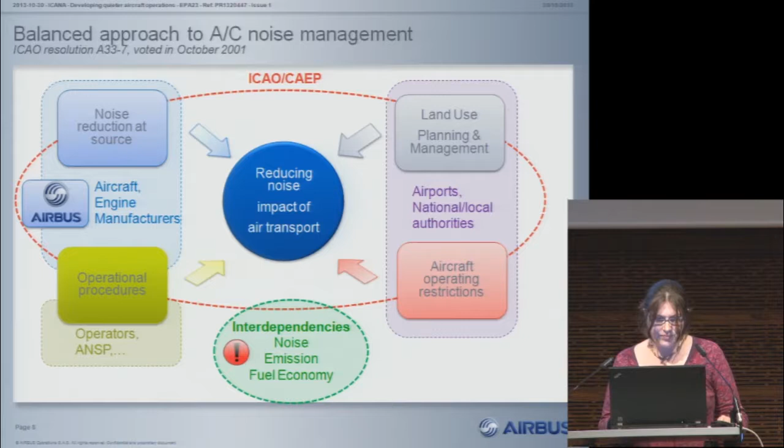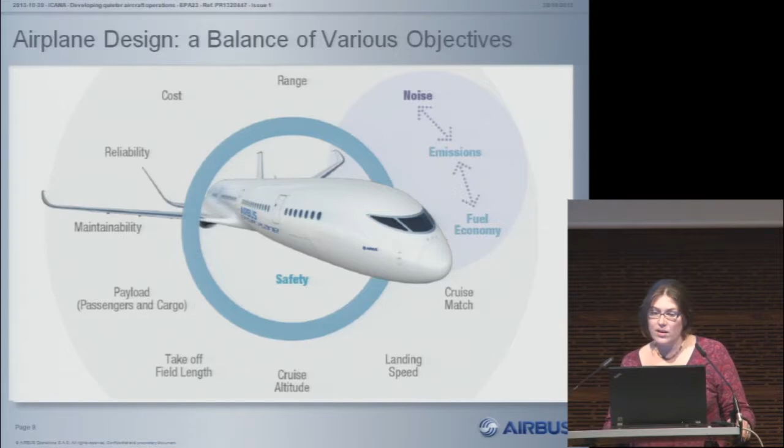On the Airbus manufacturer side, we also apply our own balanced approach. We need to take into account all these different objectives, and most of them are very contradictory—sometimes you can't optimize emissions without increasing noise impact, as we'll see with future improvements in landing gear technology, for instance. If you add some noise technology, you also add weight, which isn't good for the aircraft. So sometimes we need to balance all these considerations.

So what do we do on our side? I will follow with an overview of our fleet with our new aircraft, and we'll see the different optimizations that we achieve now.

First, the current latest aircraft, the A380. With the increasing environmental challenge and size, noise was a main driver in designing this aircraft in terms of architecture and technology choices.

What we can see in this slide is that the first level is the engine. We optimized the engine with new technology, with a zero splice inlet for instance, that leads to reduced fan noise. We also increased the acoustic liner inside the fan, and also inside the engine. Hopefully we'll show you more, but first we have an overview of what we can do inside the engine.

The second possibility is to optimize the airframe noise with new technology in terms of slat and flap, with the famous droop nose, that improves the aircraft performance. We also made improvements in the landing gear and flap slat setting, adapting the flap slat setting for approach to decrease noise. But we also work on the lower approach speed to decrease the approach noise impact.

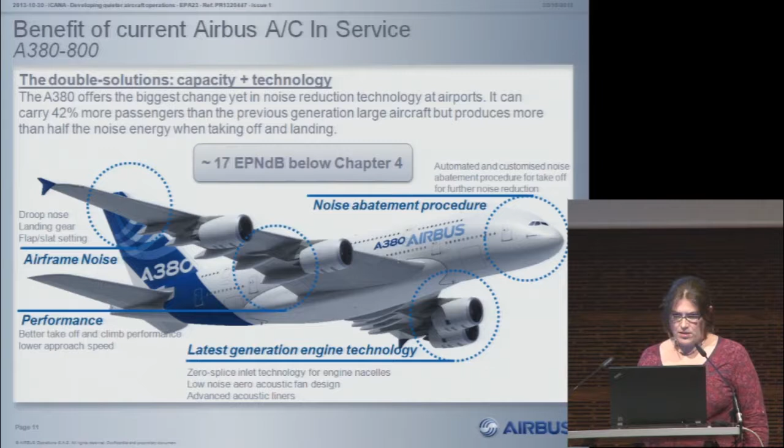What I want to show you also is the quota count limit. We talk about some levels, some measurements, of how we can incentivize or constrain noise design. For instance, the quota count limits the number of available slots. For us it's important, and we take into account this new noise index as a new requirement in our design in terms of noise, because we know it allows more slot allocation, and it's a lever to discriminate airlines and push them to buy different aircraft.

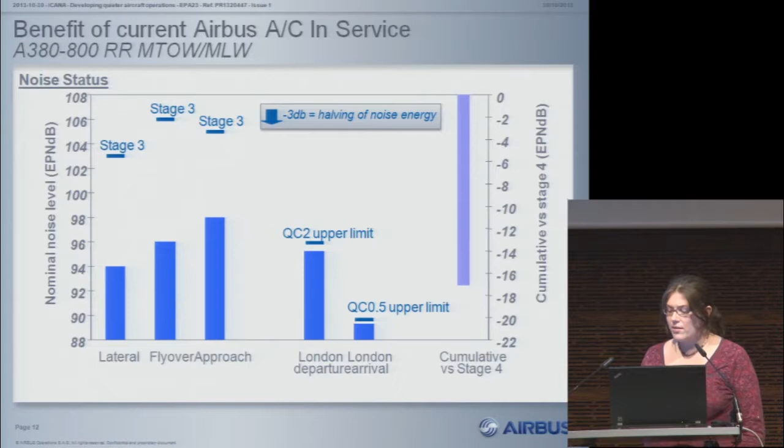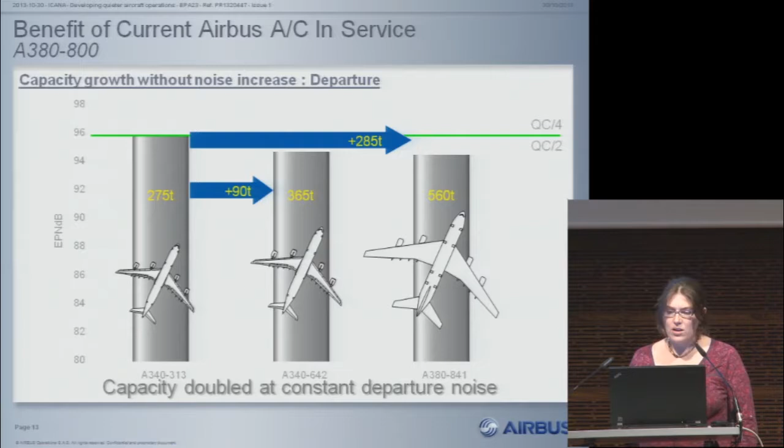This slide shows the large improvement in terms of technology and also in capacity, because this shows that between the A340-300 or -600, which have a big improvement, with double the capacity we can achieve the same level of noise. So for us it was a big improvement, thanks to all the technology I showed you just before.

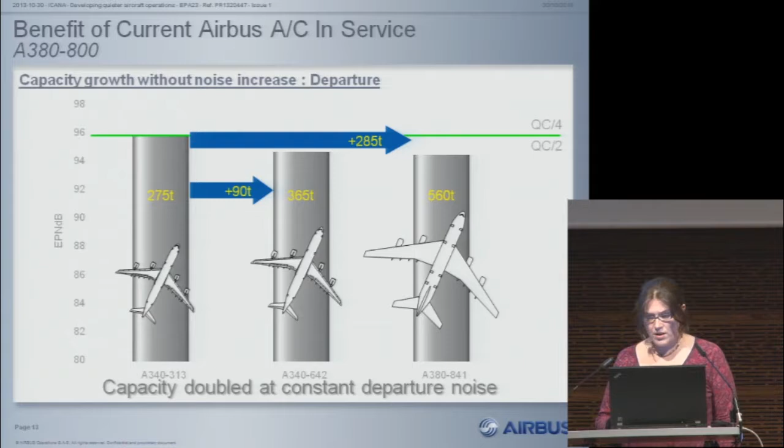So next one is the A350, our next aircraft. We inherit some of the latest new technology from the A380, but we also push and continue the design with new landing gear, management of the design with cavity, for instance new flap/slat design and with a new slat. We also push the different treatment inside the nacelle of the engine. And we also add some new avionic function in the flight management system, such as continuous descent approach management.

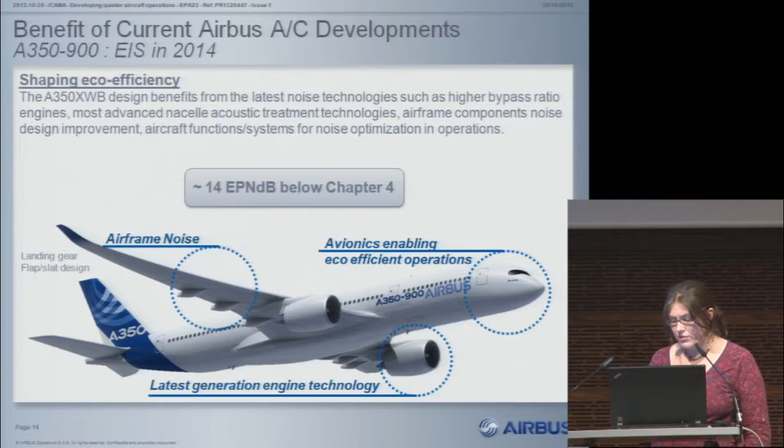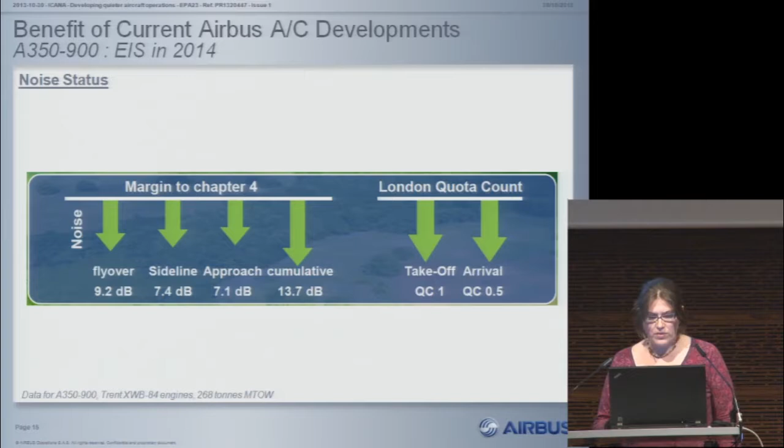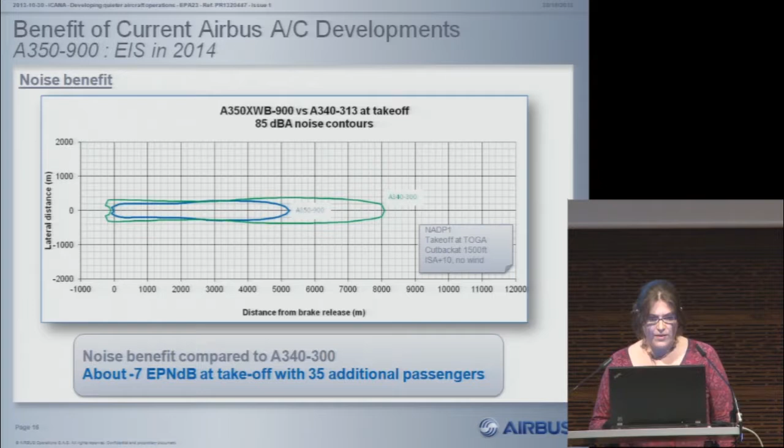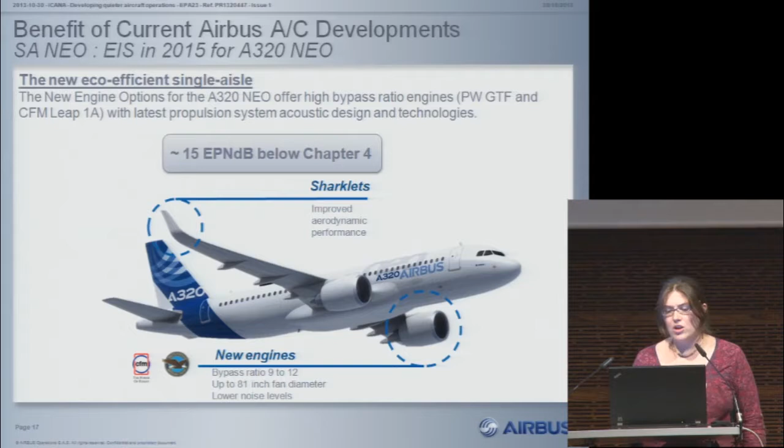The next aircraft will be the new short range, the single-aisle Neo, with a new engine option. We can offer 2 different engines, CFM and Pratt & Whitney. The noise reduction is mainly due to this new engine, because of the high bypass ratio, up to 12 for one engine, and they really improved their design in terms of engine with a new inlet treatment. So it's a very big improvement in technology. We also implement the Sharklet to improve aerodynamic performance.

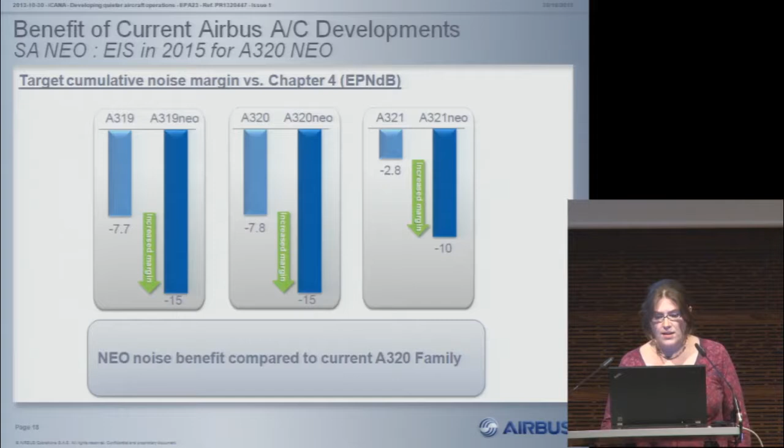So we can also see the gap between the last generation of single-aisle aircraft. This is a good opportunity for airlines to replace their fleet, because we can see that with this new aircraft, they can have a real benefit in terms of noise if we implement some new taxes or fees and noise limitations.

And this is also available in retrofit, so airlines can have this new technology.

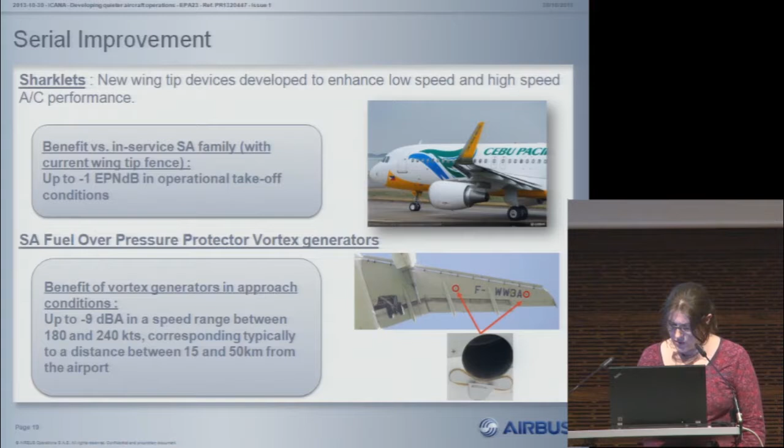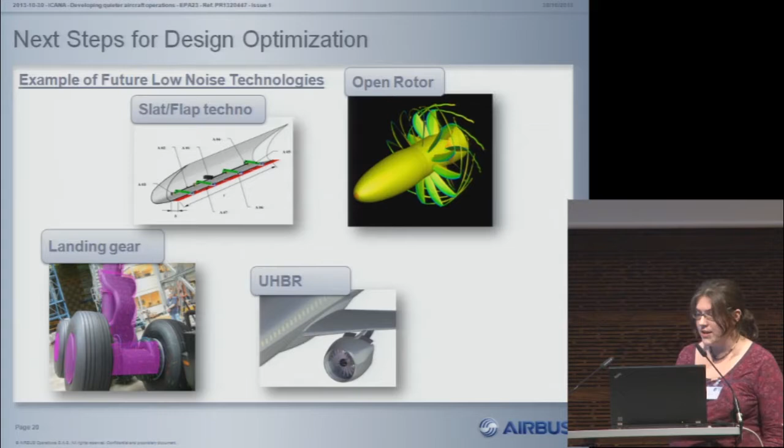What we do for the future, we continue to work on landing gear with a new mesh technology. We also work on slat flap, on slat gap, on slat adaptive, on flap trailing edge filler, and we also work with engine manufacturers on open rotor technology and ultra high bypass ratio, again to reduce the noise on departure.

And what we do in terms of abatement, noise abatement procedure: as you know, we are focused only below 10,000 feet, so we focus on just departure and descent approach. And so we have, for now, different functions available on our aircraft as a noise abatement departure procedure, equivalent to

the ICAO-A, ICAO-B procedure. And for the descent, we have the continuous descent approach, soon available on the A350. We also work on steeper approach, up to 4.5 degrees, to be in line with the regulation, ICAO recommendation. But we also design specific functions, for instance for the A318, to land in London City with angle of approach about 5.5 degrees. So we can adapt our aircraft to do that.

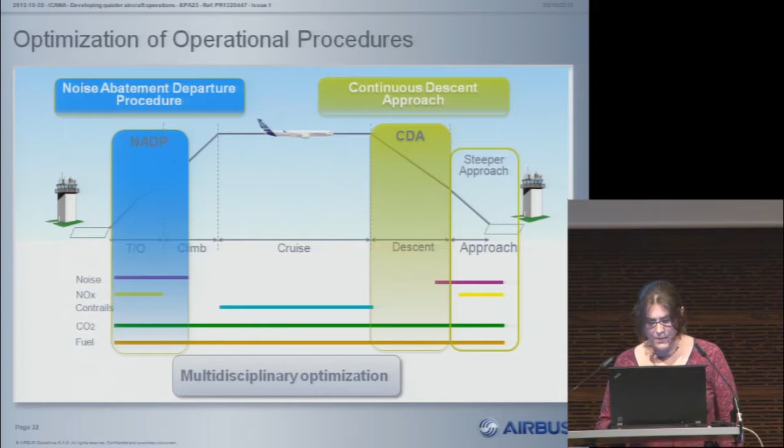But it's important to see that it's a multidisciplinary optimization, and it's mainly for the departure, because if you reduce noise, you have a strong chance to increase fuel consumption. So it could be difficult to tackle both objectives.

So what we do to optimize this noise abatement procedure: on the A380, we optimize the NADP procedure with a new software called ADAS that can optimize the procedure taking into account ambient condition or some aircraft constraints, and can adapt the vertical profile of your departure with a new optimization in the flight management system, where the pilots enter new parameters, that is to say noise thrust, noise speed, and adapt the thrust ramp. So you can tune your procedure, and you will find this also on the A350.

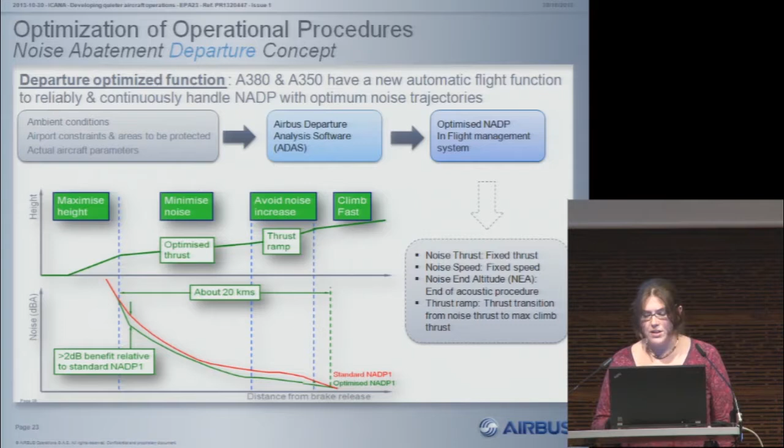Concerning the approach and descent, so I told you we work on continuous descent approach. We try to optimize our different margins. We try to optimize the design of the function to facilitate the descent management for the pilots. And we also work on increased glide slope approach by giving some keys for the pilots to perform the approach well.

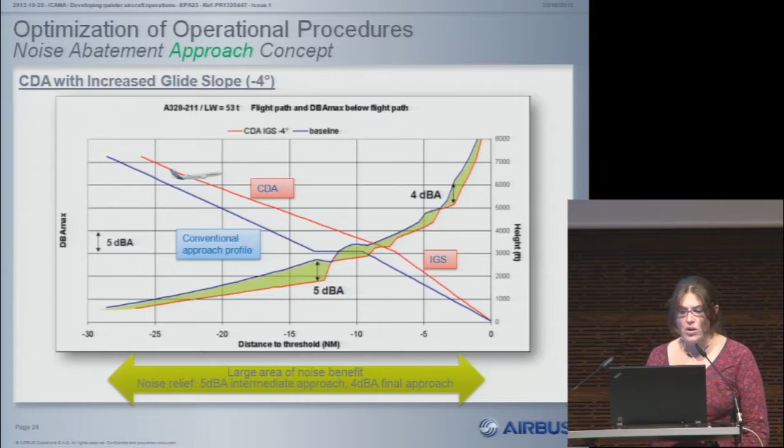Because we are sure it's the good way to reduce the noise, as you can see in this slide with the vertical profile, here the vertical profile of the approach, and below the impact in terms of noise, from the threshold here. You can see that until 25 kilometers, or nautical miles, you can expect a large benefit in terms of noise reduction, 4 to 5 dB, depending on how your procedure is published.

But we also start to implement RNP capabilities across all our fleet. In the next months, the A380 will be certified to propose this capability to optimize the vertical and lateral flight paths, and that could be useful to protect different sensitive areas.

As you can see, we already designed some new procedures. This example is for Cape Town, if I remember well, where we try to avoid some sensitive areas. I don't remember the name, but we do this type of new procedure with Quovadis, a new service capability in Airbus.

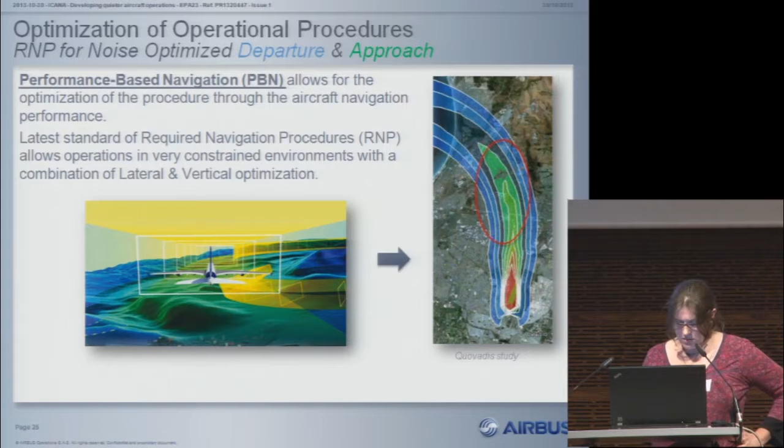And we also have many efforts on new operation optimization. First, in terms of departure, we try to optimize the departure based on multi-criteria, that is to say we try to take into account the policy of the airlines, if they want to optimize the fuel or the noise. It depends on what measures they want to take into account, if they want to pay fewer fees or maybe reduce their fuel consumption.

And so this concept, MCDP, multi-criteria departure procedure, reached the TRL4 step. And we also work on descent with energy management strategy and on curved approach based on GBAS, RNP, and RNAV. So we work with all the teams involved in this subject, in SESAR especially.

And in final approach, we focus on many points. First, on increased glide slope with another option, adaptive increased glide slope, where we try to take into account the ambient condition, the daily condition, to keep the aircraft in the same environment and to protect the safety and the speed on ground, near the ground.

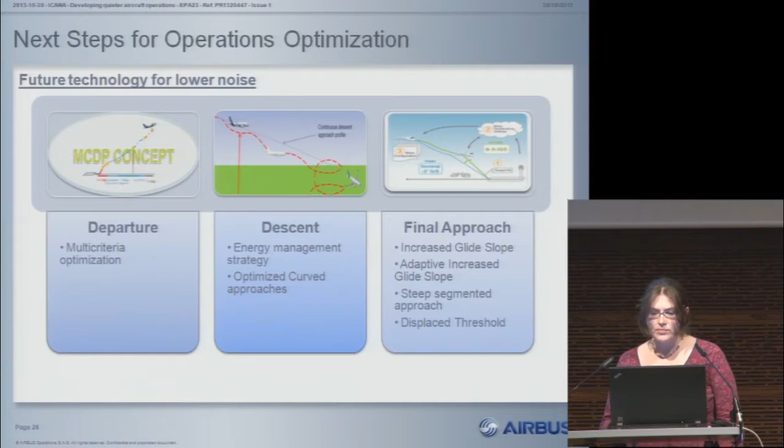So it's a help for the pilot. In this function we also reached TRL4 in the Clean Sky project. We also study the steep segmented approach, and we want to work with DFS, Lufthansa and Frankfurt to test this inside the new GBAS project, and study the displaced threshold, because we know we have many opportunities to reduce the noise impact thanks to this capability.

So to conclude, we know we made some remarkable improvement in terms of noise, but the reduction of noise at the source is now limited because we can't make numerous further efforts on that. So we need to work with other operators, manufacturers, and air traffic controllers, because it's a collaborative subject, and we need to take into account all these levers.

And also, don't forget that for now the challenge is to convince also the other part of the world, as to say China, India, that noise is also a big problem, because for now they are not concerned about that, they just want to reduce the fuel consumption. So for us, it's difficult to have a big and strong business case to develop, and to convince the funding for the different projects.

So we can't focus only on Frankfurt or Heathrow, because I only work with Frankfurt or Heathrow, but I can't build my business case with only that, because Lufthansa is limited in terms of buying aircraft. It's not Emirates, or Chinese, or Indian.

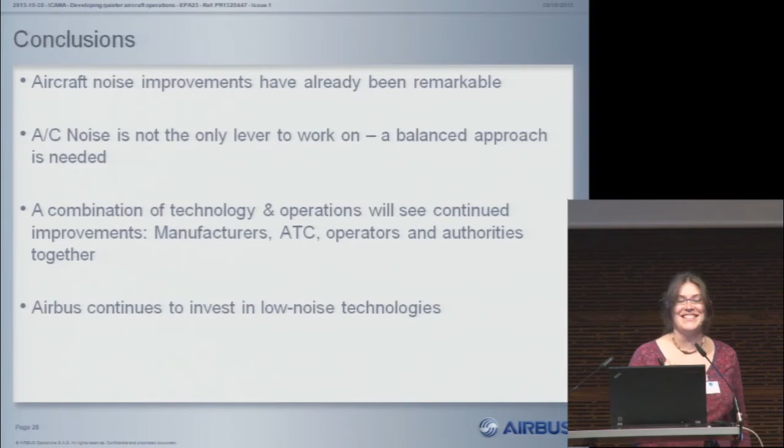But you are a European company. I would like to remind you that you are a European company, that's for sure. You are not Chinese and not Saudi Arabian.